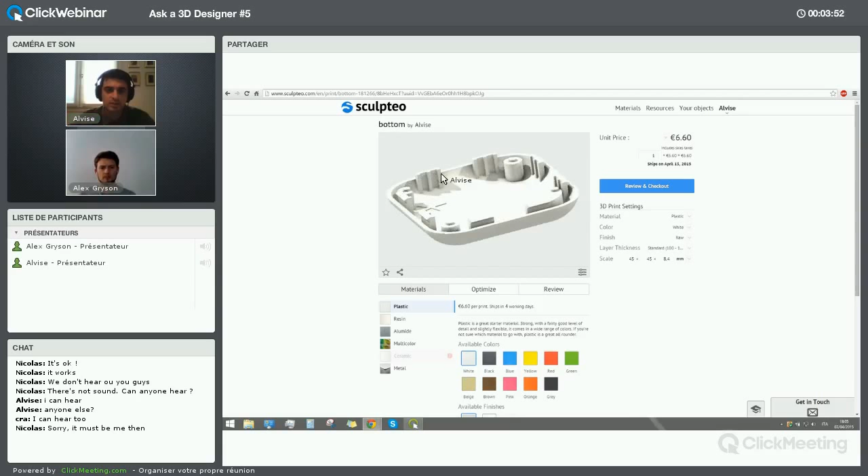Sure, so if I've shared my screen correctly, you should be watching my Sculpteo account. I uploaded the file you were talking about, Samuel Clay's file. It looks to me like the function of this part is a kind of electronic case - yeah, it looks like a kind of casing, a plastic component of a product.

So as you said, the concept for this user was he had to produce a manifold file, and he said he succeeded in doing it, and was asking for more advice. So we took a look at it, and we did see a manifold model, but we found another problem in it, a very small one - it's a multi-shell file. But let's talk about what it first means to be manifold for a 3D model.

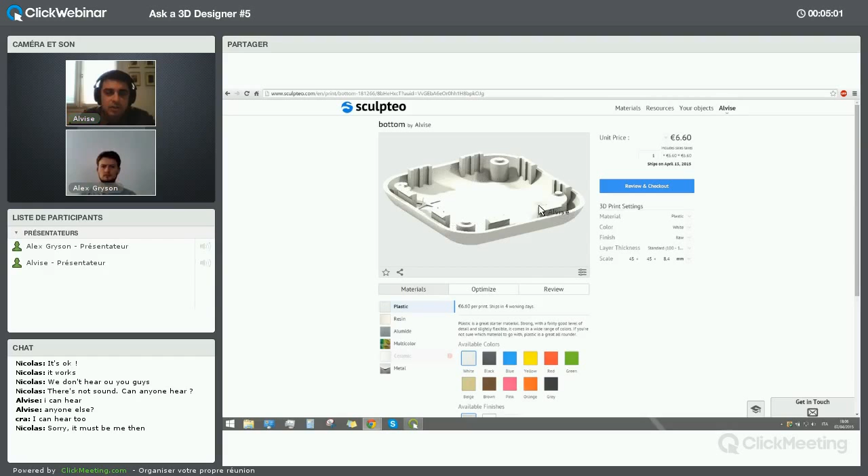The mathematical description of manifold is quite complicated, but long story short: each edge of a printable mesh needs to be connected to 2 triangles, no more, no less. This means that the amount of triangles composing the mesh is closed, or as some say, watertight - there are no holes, it's connected.

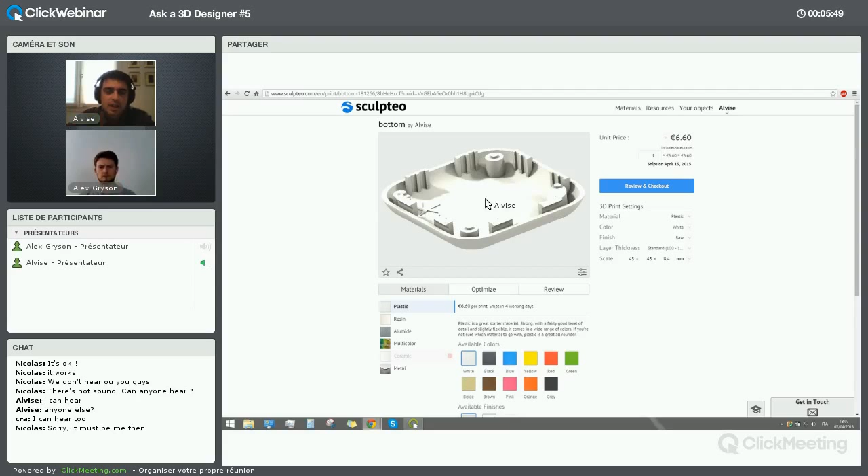That's pretty simple. So this user succeeded in creating this, but what he didn't succeed in is creating a single shell model. So how can this be both manifold and multi-shell? This model is composed of, I think, around 20 shells. Each shell represents a part that is manifold itself, but it's intersecting other manifold parts. So even if the model is the sum of many manifold parts, it's not correct - these intersections are not good for 3D printing.

We've been talking about multi-shell objects already in the past 2 webinars, and now we have another case here, and we can show you similarly to the previous 2 ones.

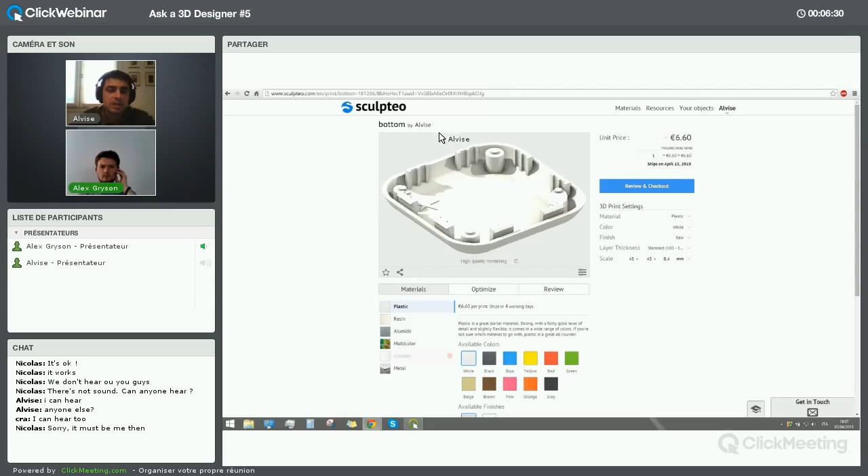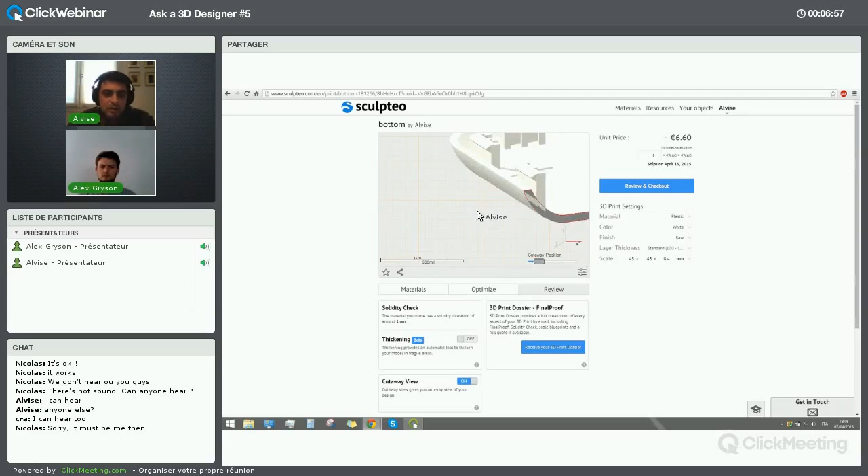So first, take a look at the website cutaway view, identify these shells, and see how this multi-shell file looks. For example, here you can clearly see this snap that is intersecting the base of the part, and in the same way, if I cut away in another way, I can see the same thing with the cylinders on the corners of the part.

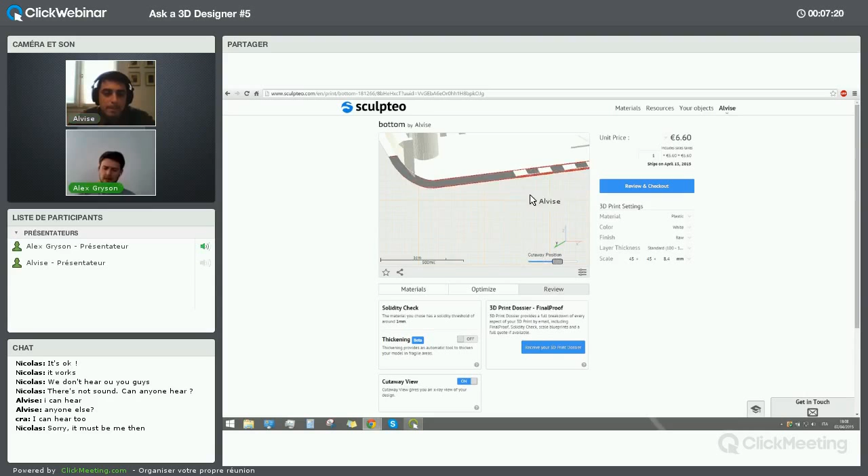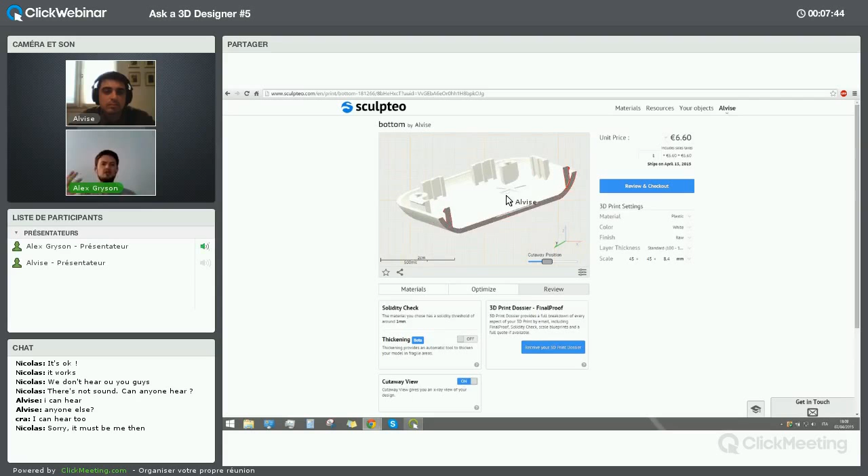Just to summarize here, Samuel gave us a model, and he wanted to make sure the model was manifold, which means watertight, meaning it's a single object and a complete volume that we can 3D print. But it was still refused for 3D printing, and what we can see here with the online cutaway tool is that even though it's manifold, we have many intersecting volumes, causing a shape impossible to 3D print. That's why it was refused, and that's what we need to fix now.

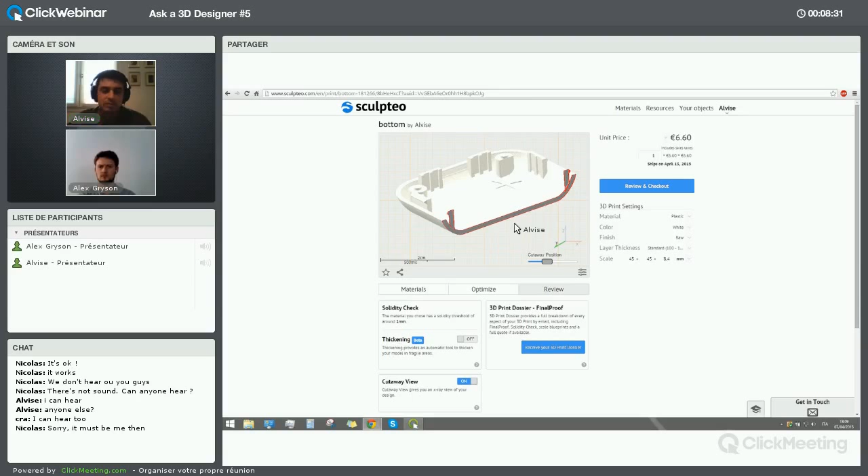The way we will fix this is similar to the previous two webinars. Samuel has been modeling this part in Rhinoceros, and he kindly gave us a modeling file, specifically a step file. So we'll use this modeling file to fix the multi-shell problem.

Every time you have access to the original source file of a model, you have way more control of the part and other privileges that you don't have in mesh modification software like MeshLab or Meshmixer, as we showed in the last webinars.

This is Inventor, the CAD software I'll use for this operation. Step is a good format for exchanging CAD files—it works in every CAD software like SolidWorks, Rhino, Pro Engineer, or whatever. So the steps I'm going to show you now to correctly model this part can be replicated in any CAD software you have. The features are really similar, and the names of the functions might differ slightly, but essentially you will see exactly the same kind of workflow.

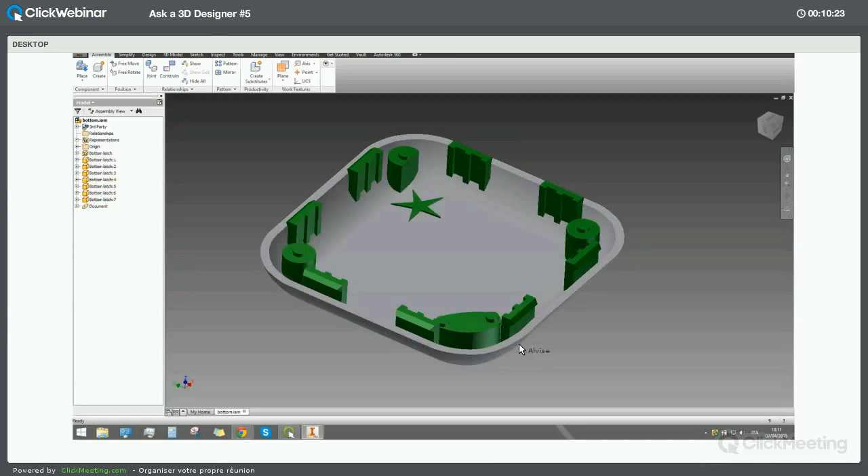This is how the step file looks. On the stack on your left, you can see 9 parts—we are treating them as bodies.

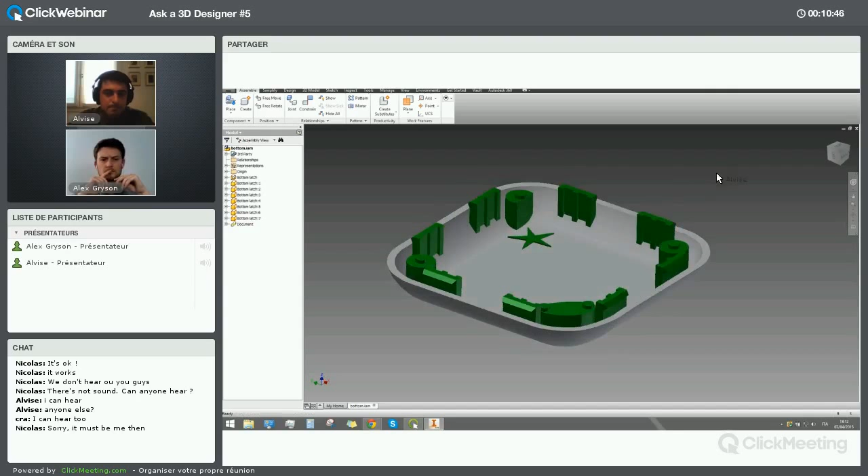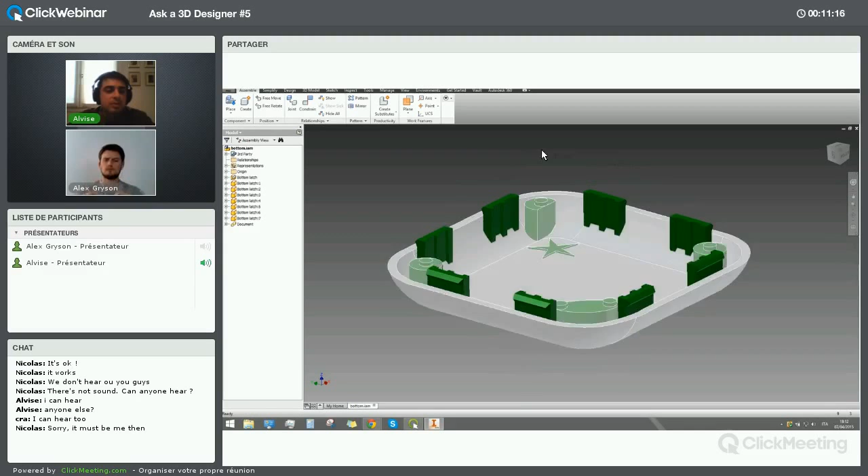The editor showcases a step file. In Inventor, it becomes an assembly file—that's how Inventor refers to it. So every shell of the model is treated as a different part, and there are these 9 parts on the left. The first thing I want to do is check how these parts fit together.

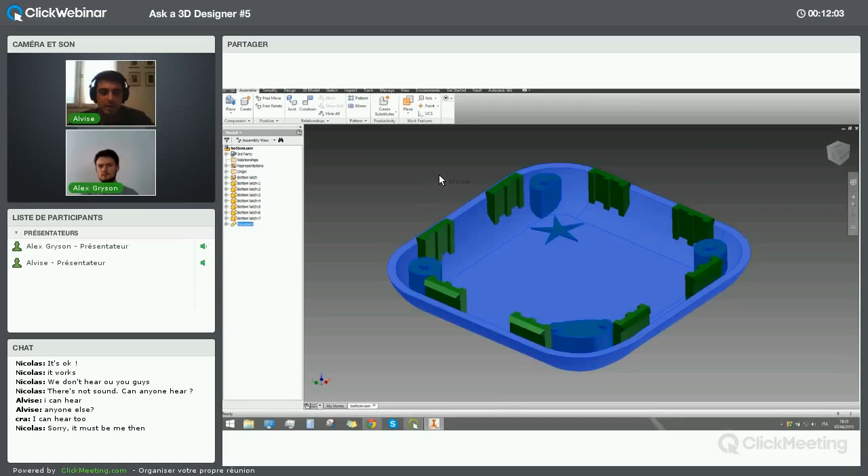To do this, I need a cutaway to see inside the model. The way to modify a part in Inventor when I'm in this assembly environment is, the only way is to enter the part—I can't modify parts while in this environment. I'll enter the first part, the main body of the object, by double-clicking on its name on the left, and as you can see, the stack is open, and I'm now able to modify only this part.

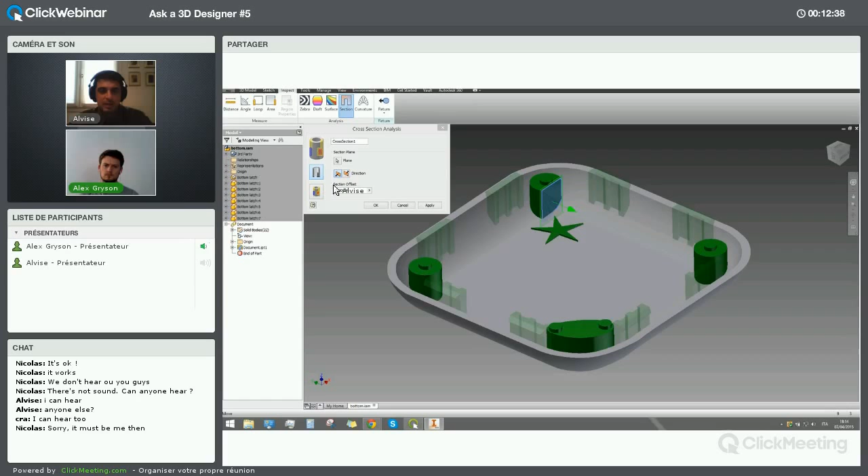For a cutaway view, I need the inspect and section feature—plane that I want to use as a cutting tool—and move it to where, in this case, here, and click apply. I'm now watching inside. In this first part, I have these cylinders that are not exactly intersecting the main body of the object.

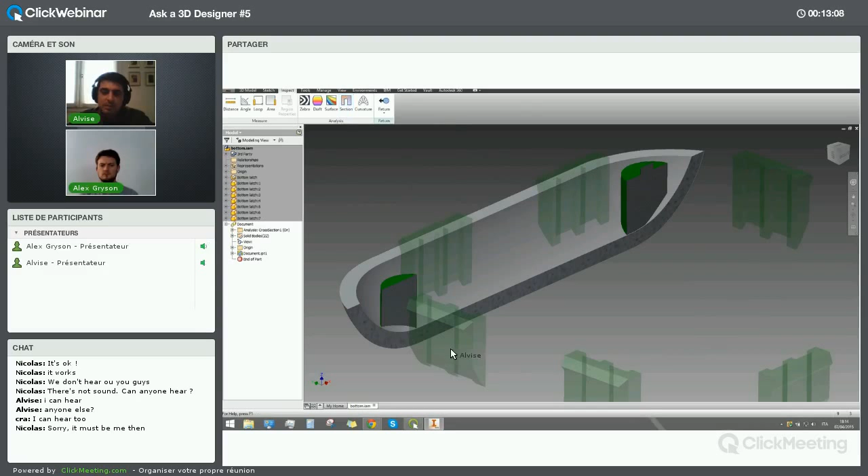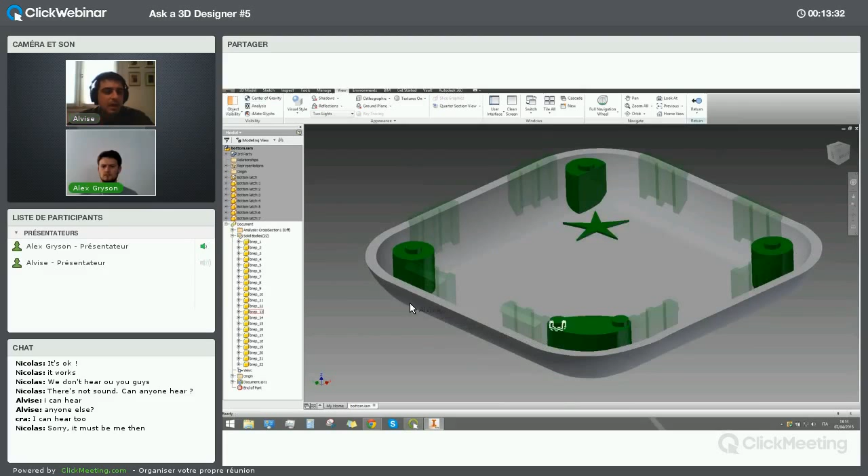In order to fix this as before, I'm going to proceed in this way: open the bodies stack, all the bodies that belong to this object, and hide the main one so that I can proceed to cut these cylinders.

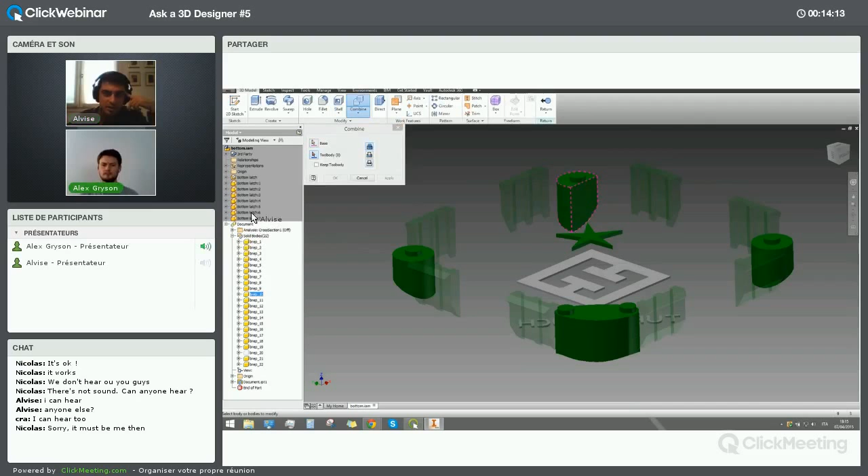As you can see now, I can select them separately. This means that if I want to perform the same operation on each of these cylinders, I'd have to repeat it—to avoid this, I'm going to merge them into a single body so I only have to do this operation once. To merge bodies, I use the combine tool: select first a base, then a tool body. The tool bodies are all the other bodies I want to merge with the first one. The purple is the base, the blues are the tool bodies. Join and apply.

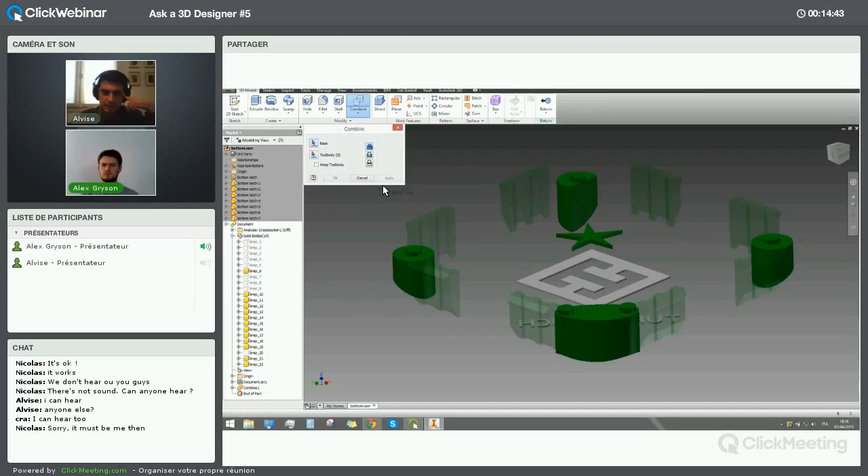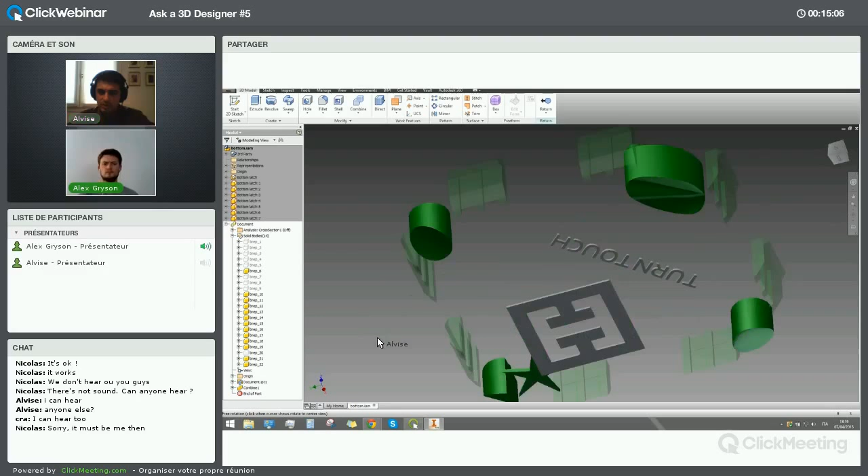Now I can select all of them together. Next, since they are irregular, this won't be a clean operation at all. I want to create a flat base first and then extrude them to reach the main body. So I want to cut these 4 cylinders with a planar cut.

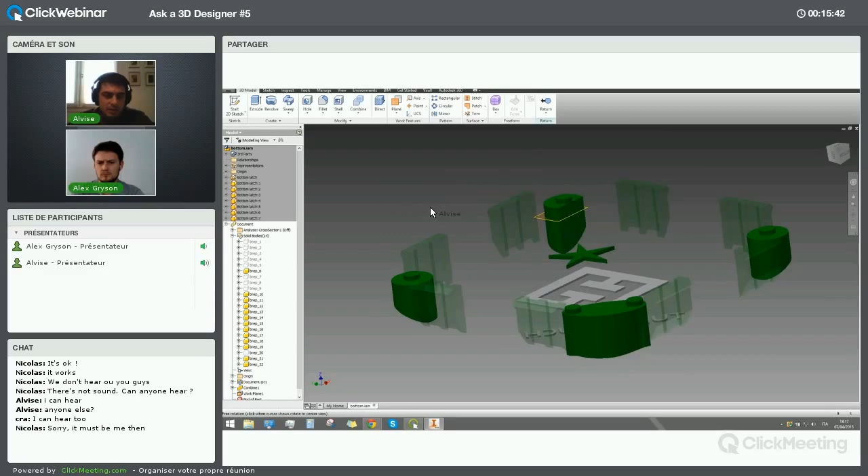I tried to create a plane to use as a tool for cutting. So, offset from plane, the horizontal plane, and bring it. Just be sure it's where I want it to be exactly. And then, split tool.

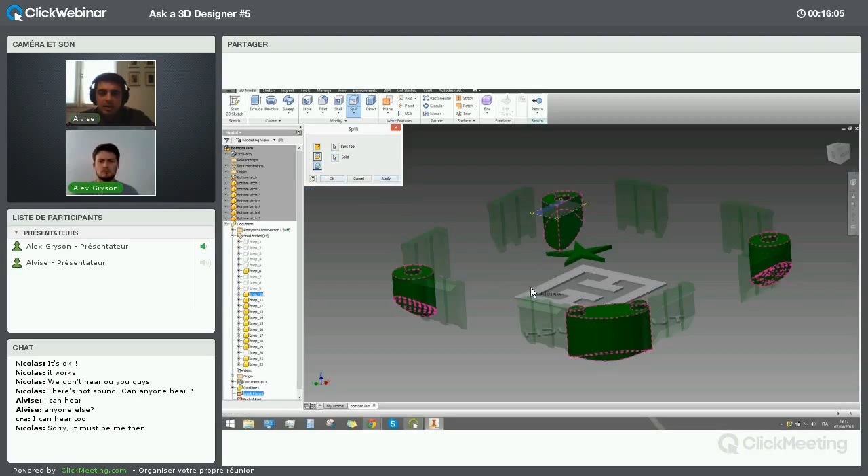I will select the third option, split solid - that's what I want to do. First, select the splitting tool, which is the plane I just created. Secondly, select the solid that I want to split - that is all the 4 cylinders that I just merged. Apply, to see it shaded with edges.

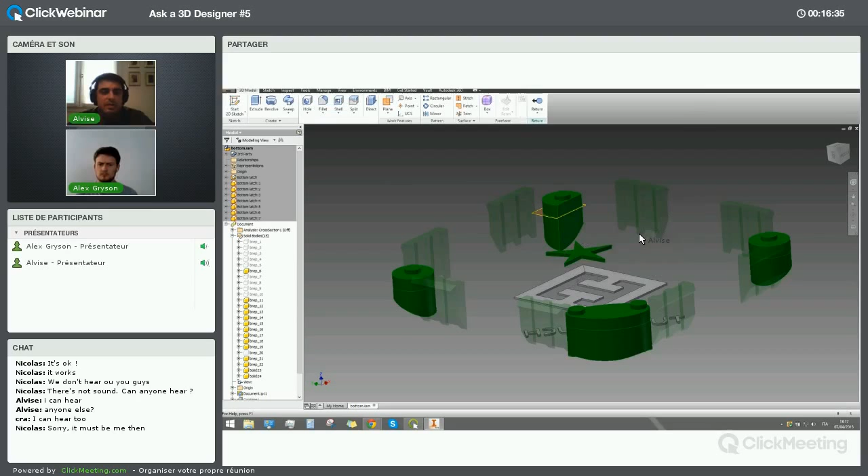So now I can see a line. This means that I cut this 4 cylinder shape, and I want to delete the bottom part. So, modify, delete faces, and select lump or void in order to select all this bottom part, and click OK to delete them. Now the main body appears.

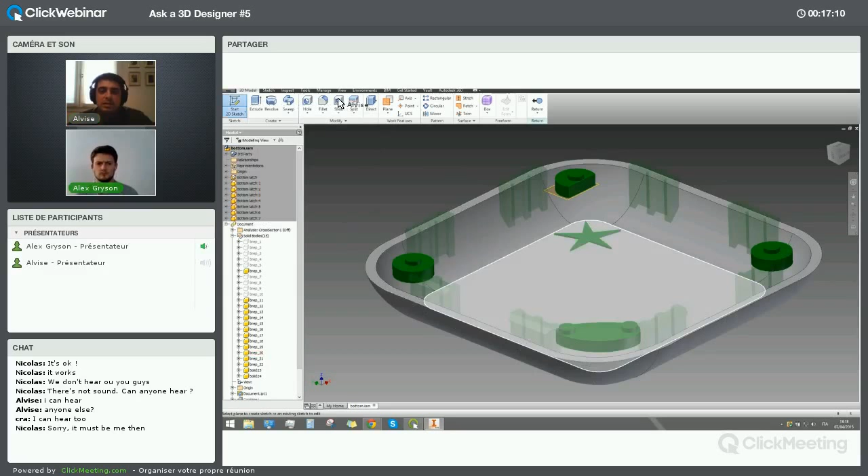Now I have a clean area to extrude and merge with the second one. In order to extrude those faces of those cylinders, I first need to create a sketch to use as a base, so as a sketch plane I use the same plane created before. I'm going to use slice graphics to find those lines that I want to be the base of my extrusion, and project cut edges.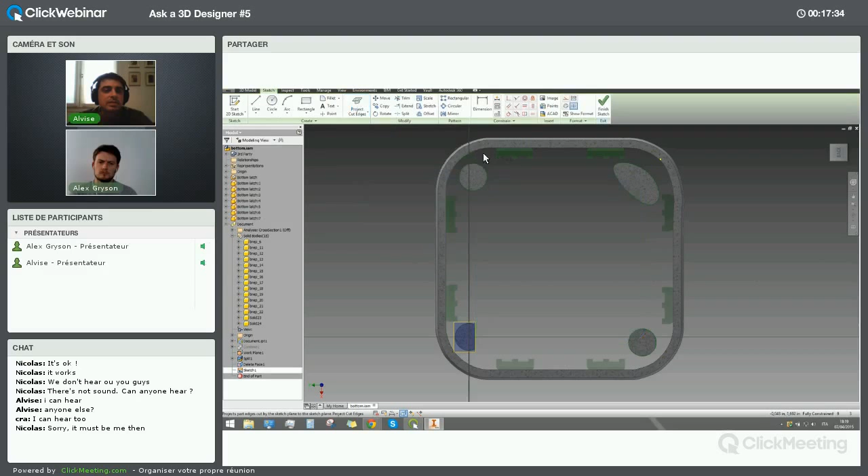Select the plane - those yellow lines are now the cutting edges that I want to use. Finish sketch. I'm going to use the extrude button and select the inside area, the closed loop that I just created. So now I have 4 cylinders, but I don't want them to be extruded.

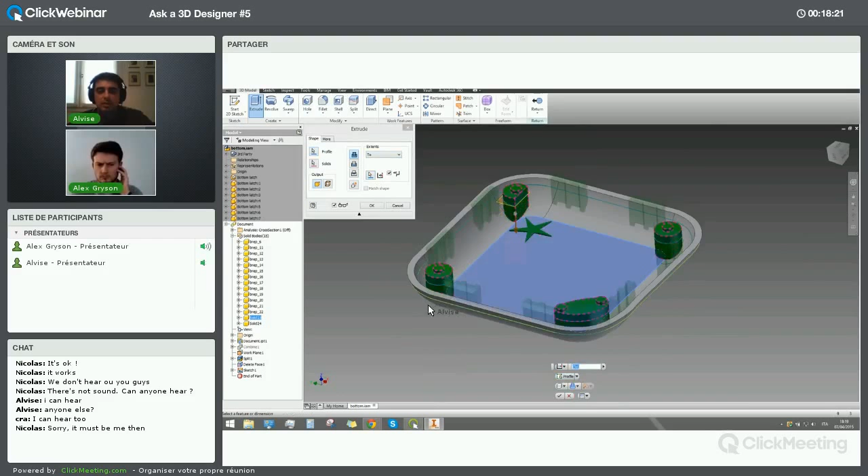I'm going to use the extend option and select... it means that I need now to select another surface to be set as the limit of the extrusion. So I select the bottom surface of this concave part, and as you can see...

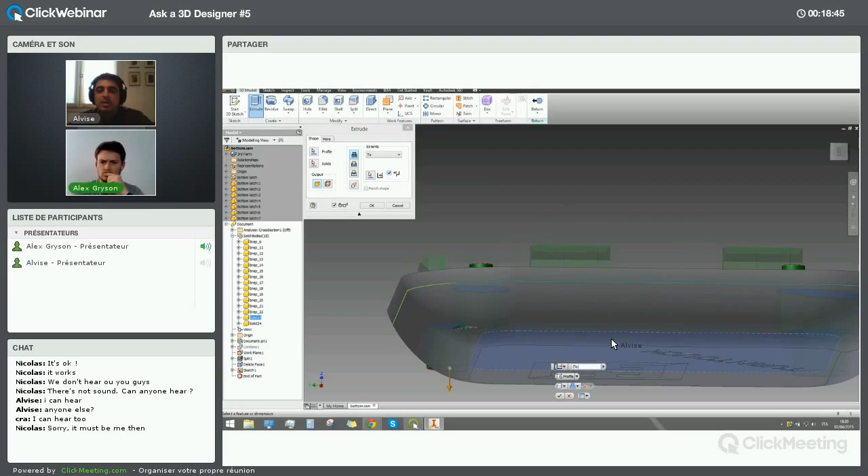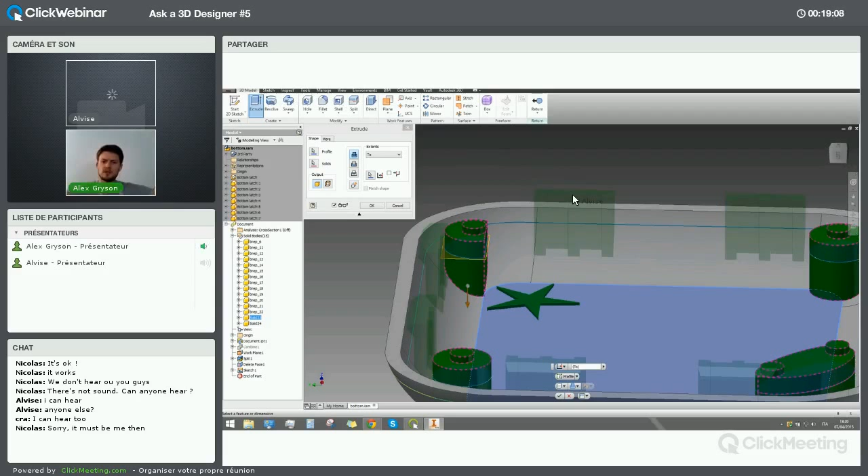Sorry, Alvise, you cut out for me, but I'll just sum up here quickly. So what we had were these multi-shell objects, and what you're doing is using the lower surface to cut these so that we can merge them both.

So I've now recreated this part correctly, and this is the perfect moment for...

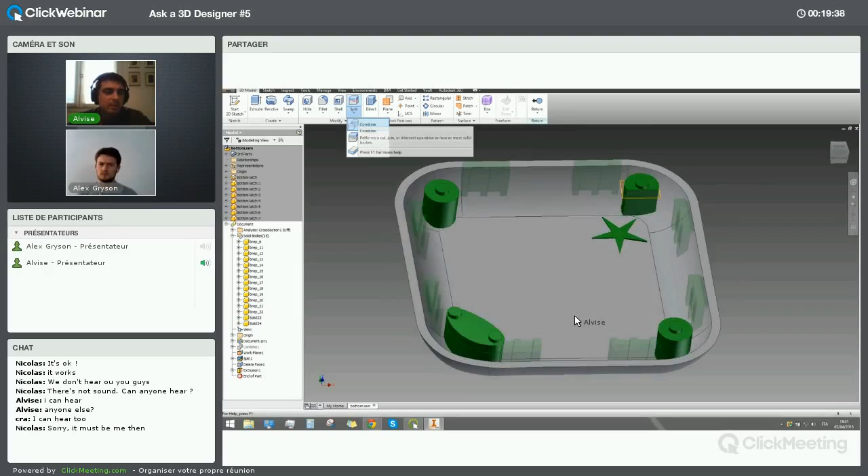...a Boolean operation. In Inventor it's called combine. I simply, as I did before, used the main body as the base and the second as a tool body, and I have this star here that is also an intersecting body, so I used it as a tool body as well.

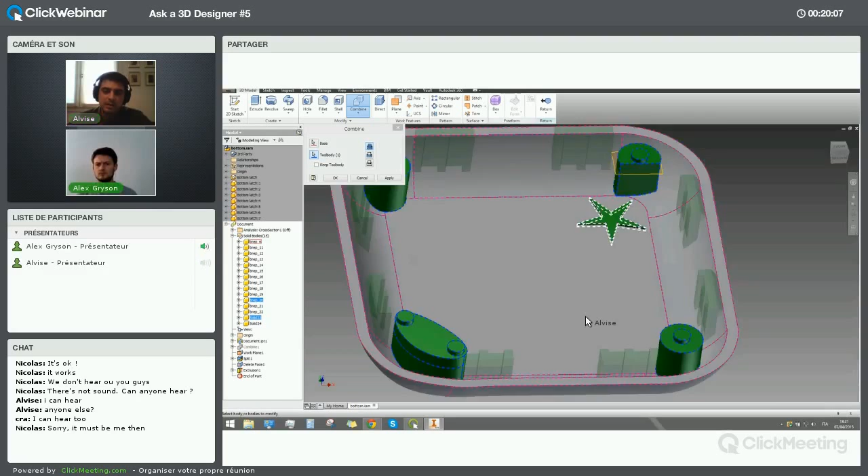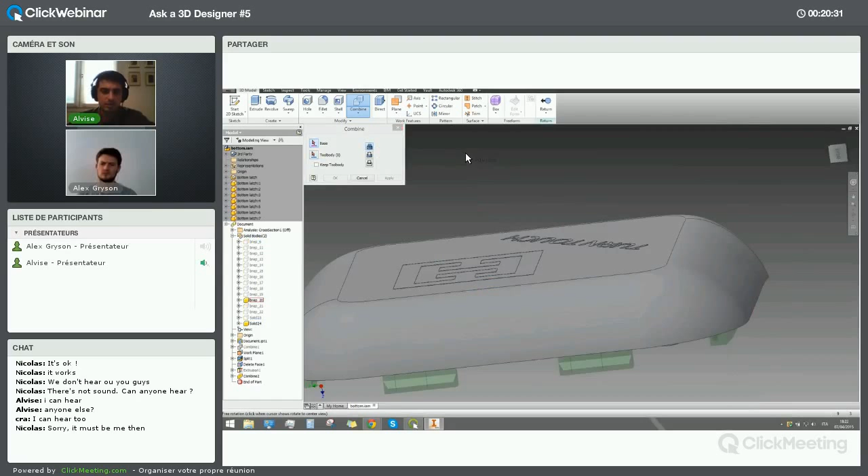Then on the back here, I know that I have more bodies because of the logo. This logo has been drawn on the back and is extruded from the back. So I'm going to merge all of this stuff together, and now I have one whole body - the star is merged with all the cylinders.

I know Inventor, but I don't know how to do that in SolidWorks or Pro Engineer or other solid modelers. Inventor allows you to pick as many elements as you want - you pick a base and then an infinite number of tool bodies to merge. So yes, that's pretty handy.

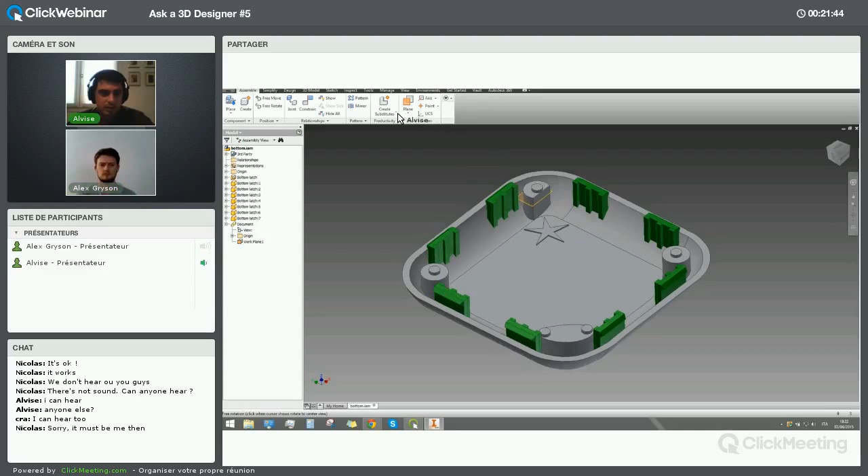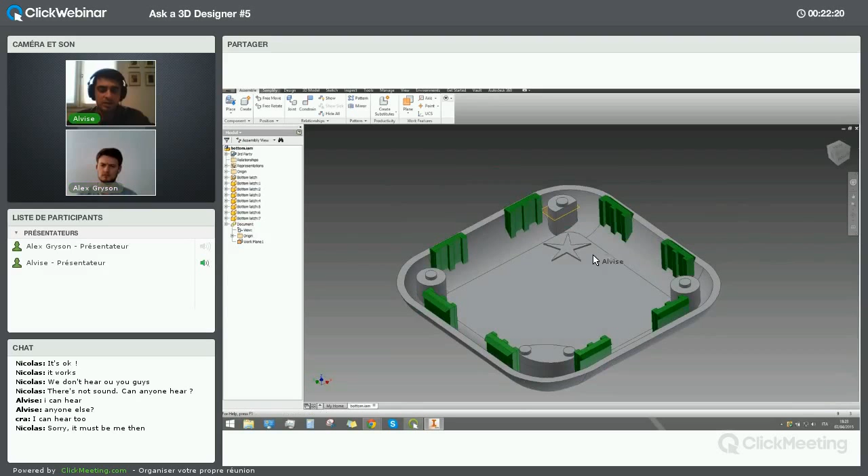So I'm back in assembly mode. As you've seen, I now have a correct main body, cylinders, the star, and the logo in the back. Last thing I need to do is merge these green elements that are repeating on the edge of the main part. Since they already fit perfectly with each other, they just need to be merged to the main body. I will use a feature that Inventor allows.

You can find this in the Simplify tab, and it's a feature you can only find when in assembly mode - meant exactly for this purpose, to merge different parts together into a single object. The assembly must be saved before performing this operation, so I save all my parts, click OK, and go back again to the Create Simplified Part function.

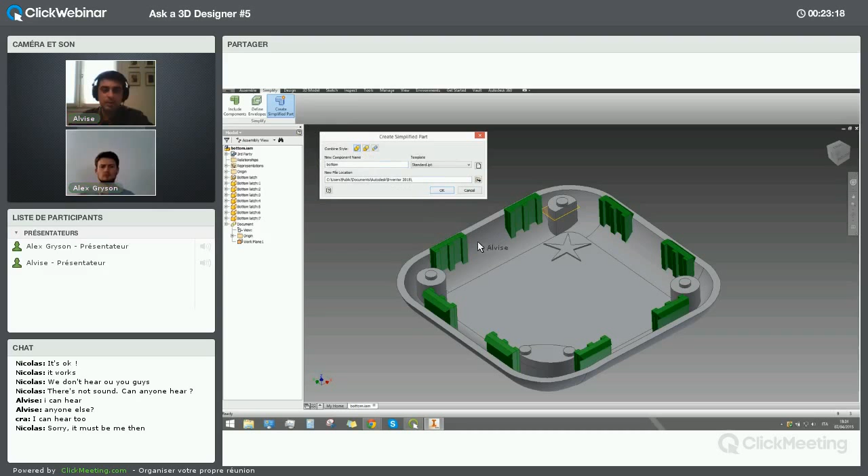As you can see, if you remember, there were colors on the model - some parts were gray, some parts were green.

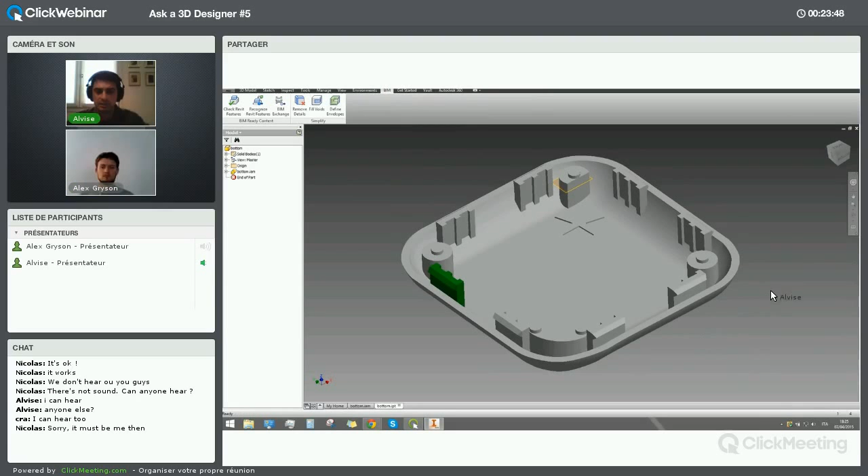When performing this Boolean operation, these colors merge, and the software randomly decides which one to keep. So, for example, this part stayed green, this gray. If you want to keep colors on your model, it's always better to perform all the Boolean or editing operations on the geometry first.

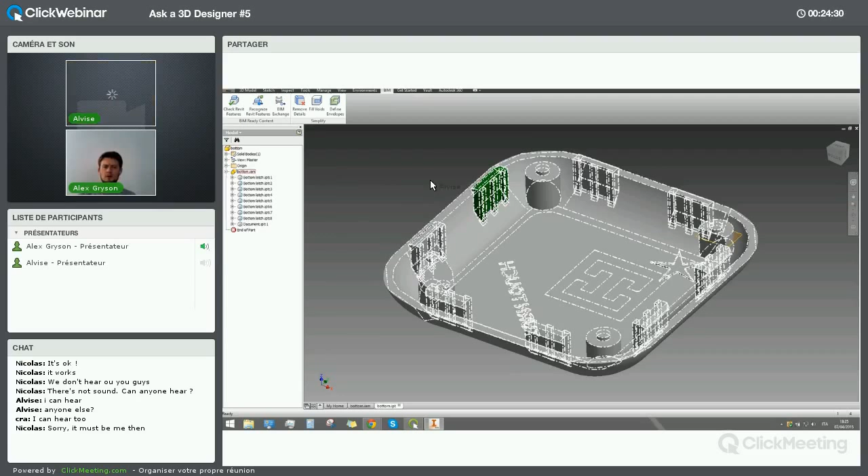And only at the end apply colors to the faces of the surface of your model, in order to be sure they will not be lost or changed. So Alvise, now that we've fused this model together, we can upload it like this to Sculpteo and it should be printable now, right? I've got the result that you wanted. You can see here on the stack on the left.

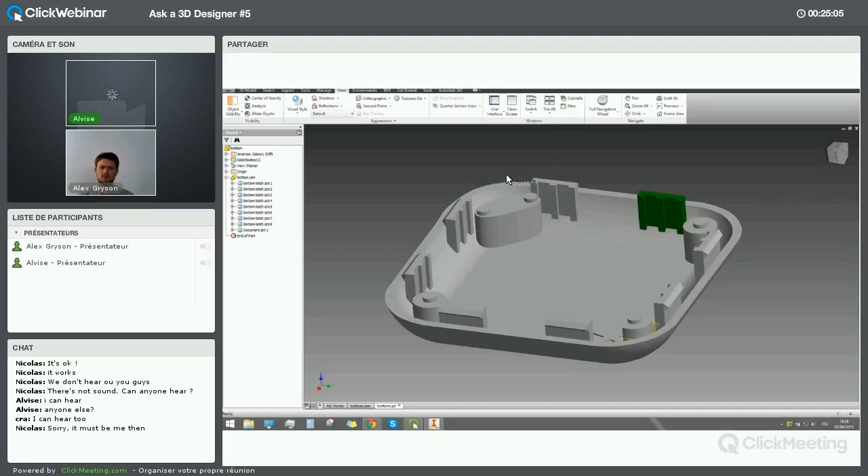Option in print, and then 3D print preview. New environment pop-up. Here you can see that the model has been meshed, and you have some information about the mesh at the top of the viewer: number of facets, 55,000, and the file size here. You can decrease or increase the quality of the model or faces by tapping options. In this window you have a couple of parameters to tweak. For example, if I reduce the maximum edge length, it affects the quality as well as file size, so this depends on the quality you want.

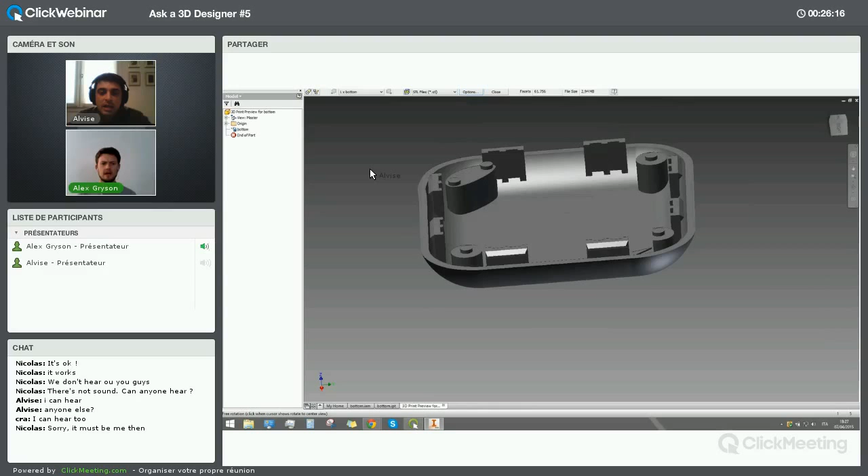Okay, so Alvise, just to cut through, we started off with a CAD file from Samuel Clay. His model was manifold, but it was multi-shell. What we've just done is turn it into a single shell, and that should resolve all the remaining problems for this file. It should now be printable. We might need to stop there for this model because we're at 25 minutes, and I'd like to look at the next subject.

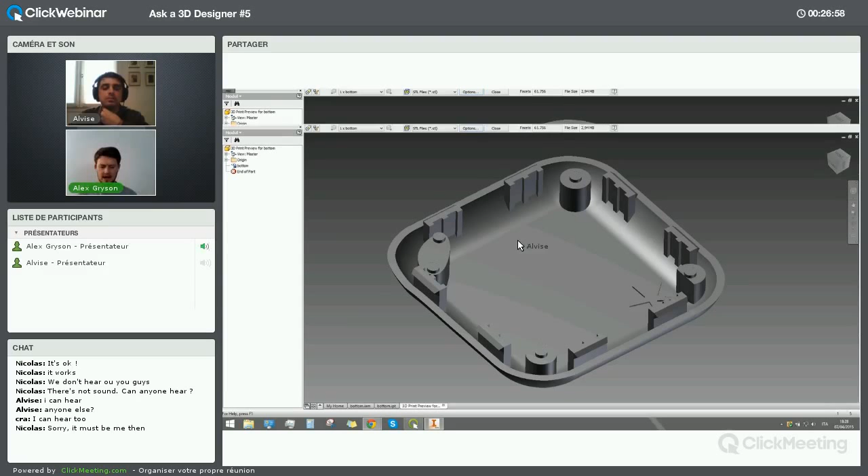We have a 3D scan from Pascal Verbeke, I hope I'm pronouncing your name correctly. And so this is a 3D scan of a head, right? Yes, and it needs fixing. Could you tell us a little bit about this 3D scan?

Yeah, we'll just open it up. So just to explain, Pascal is another customer who sent us this file. Okay, so here we see the scan.

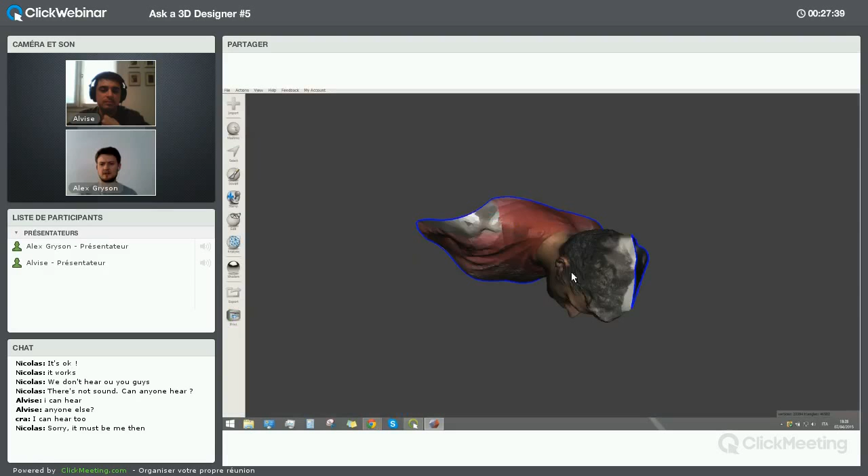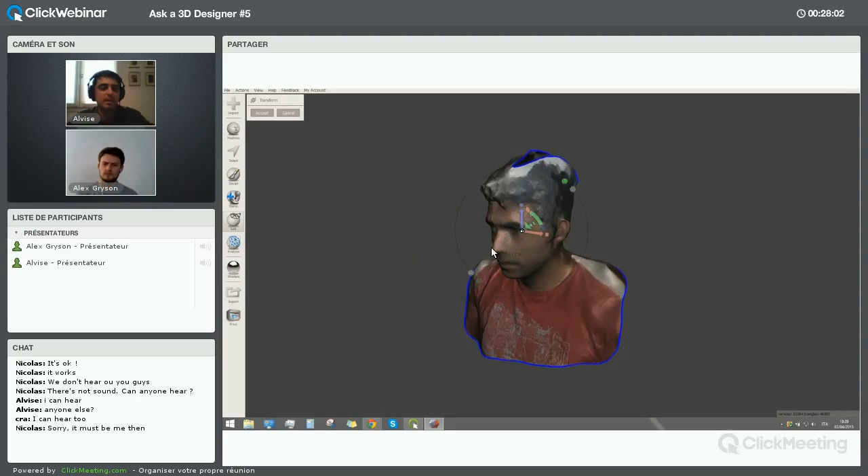Okay, so we can see your screen now, Alvise. We can see there's a hole in the head here. We'll need to be able to fix that and also maybe create a base. Okay. Yeah, can you hear me correctly now? Yep, that's fine. So tell us about this scan.

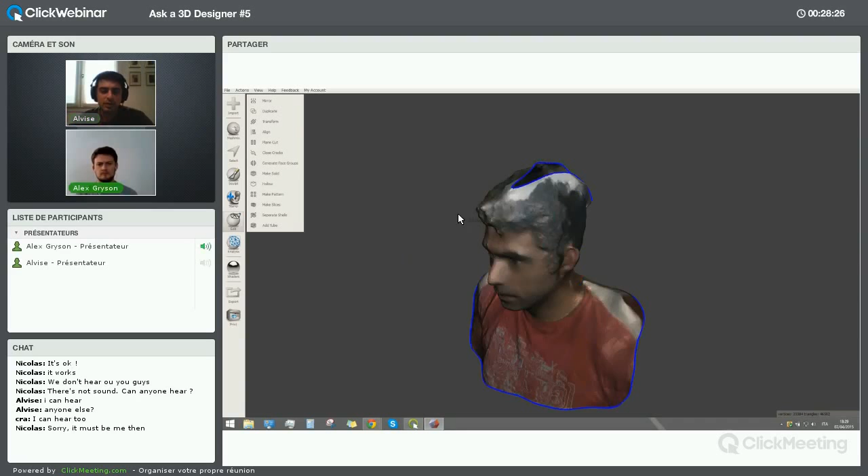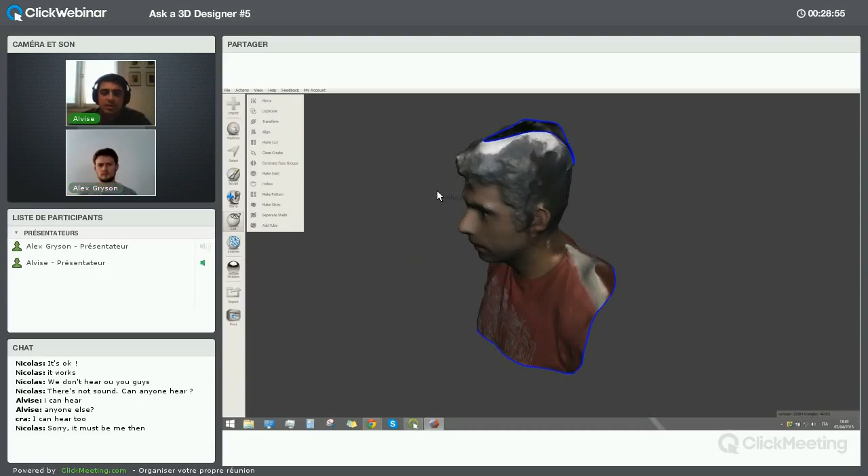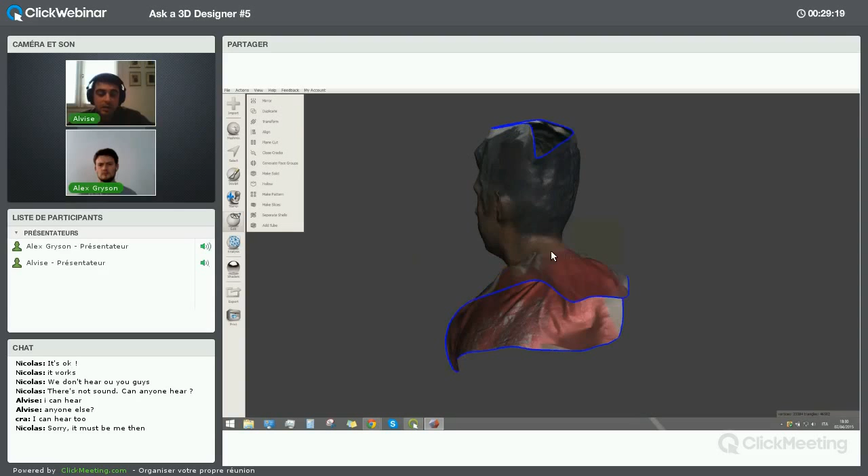We just opened this OBJ file with texture, and we can see that the blue lines are defining two big holes in the mesh. We want to basically close these holes. They're not very simple holes because they're big, and this requires the user to actually create new geometry. They have to be handled a bit differently from normal holes.

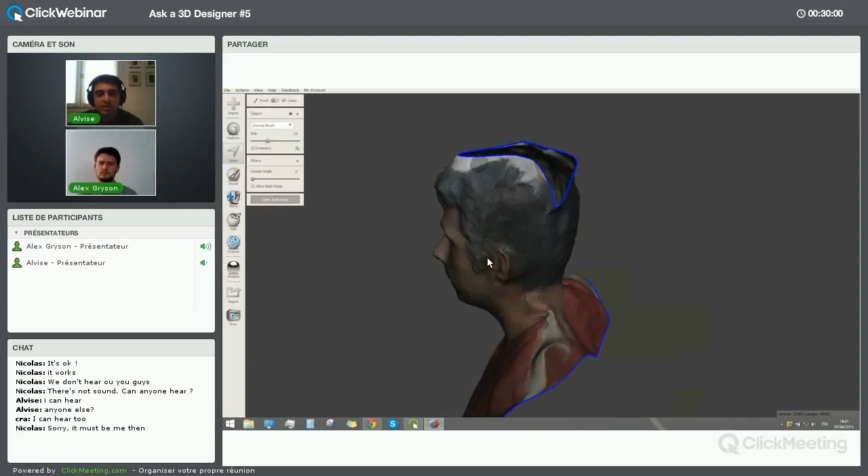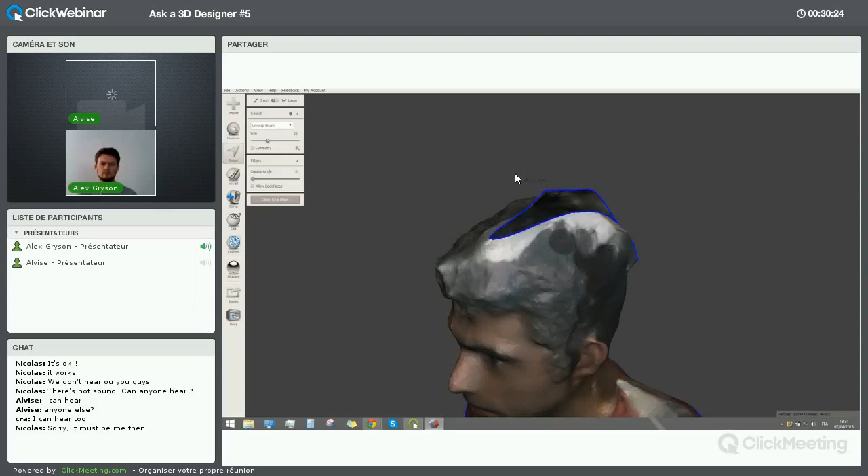Okay, so Alvise is selecting the lip of this hole, and he'll now be able to close it up. So I'm defining all the areas that look strange on the head. I want them to be deleted.

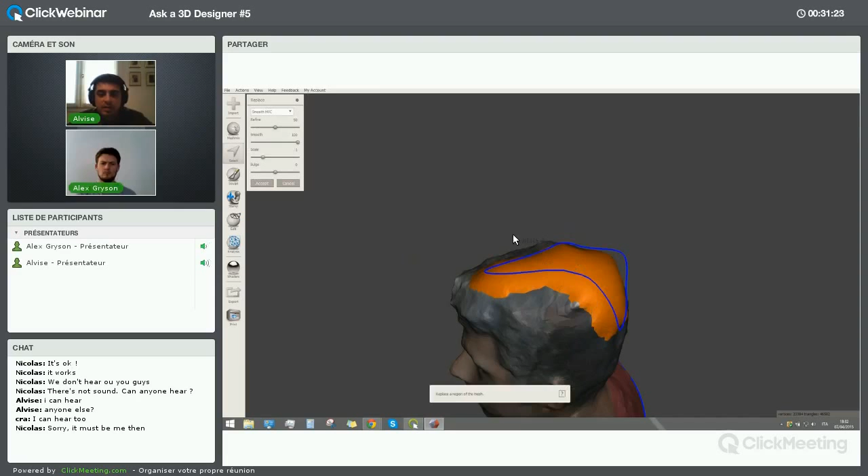All right, and the tool is edit, erase and fill, in the selection tab. So as you can see, all the orange triangles that I selected before have been deleted and substituted with this new geometry that is now covering the whole hole.

In the top left, I have some parameters. I would suggest you first press W on the keyboard so you'll be able to see the edges of the triangles. The first thing I want to do is make all the new triangles as big as the triangles around them, so the model will look uniform. To do this, I will tweak the parameter refine, and adjust it until I visually think it worked.

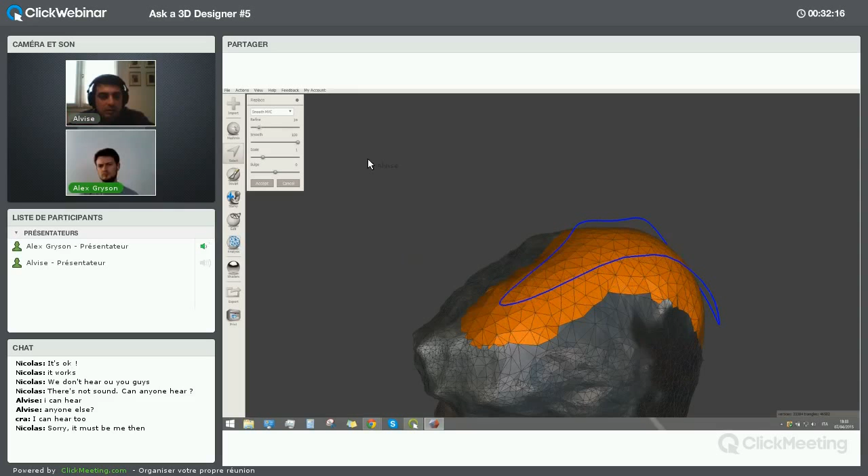Be a bit smaller, too big. So we'll bring down the scale value.

Here I can play around with this smooth tool. It's very useful, smooth. It tries to create tangency in the edges, so I will keep it high in this case. So yeah, the shape looks good now.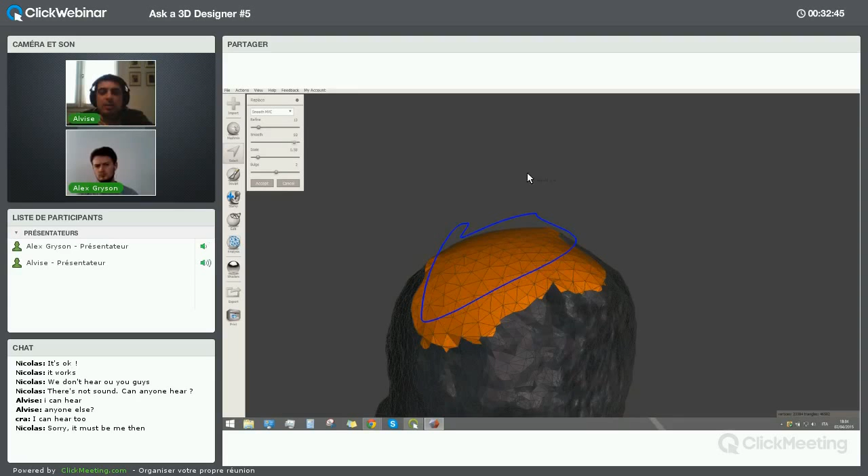I'll click on accept, and the modification has been updated on the model. As you can see, the colors of the textures have been reported on the new geometry. Pay attention that on the new model there will be a new image file representing the texture applied to this new geometry, and this new image file has to be included in the zipped file you will be uploading to the website or opening in another software, whatever brings this model.

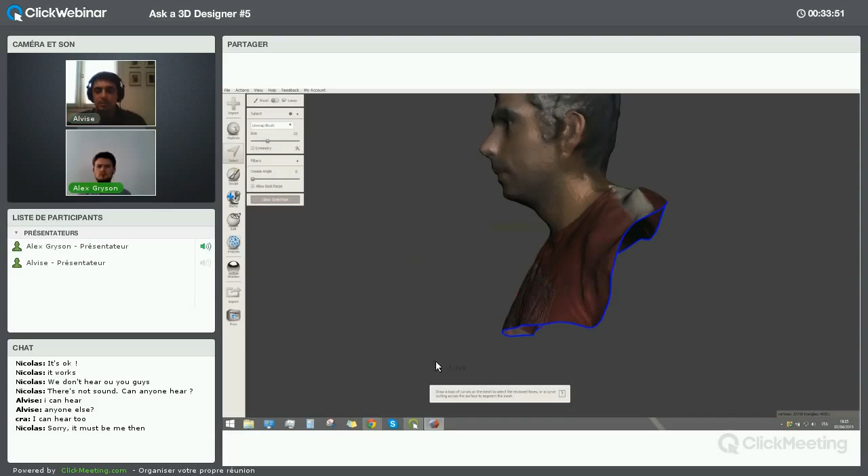So let's now go to the main problem of this mesh. Same technique to close this part, but tweaking it a bit differently. I will try to create new geometry on the back, all this part here, in order to make a planar cut later and have a flat base in the model.

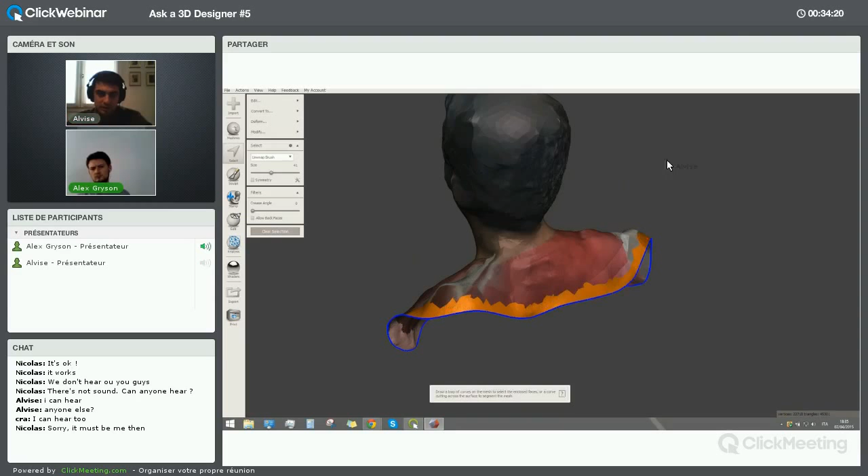Then I would need to cut all the shirt back, what I want. So again, try a bit bigger, and I'm selecting all the areas on the edge. As you can imagine, the scale parameter will be kept higher in this case to create a bolder part.

Okay, now we're good. Edit, erase and fill. Big, lower the scale, the bulge as well.

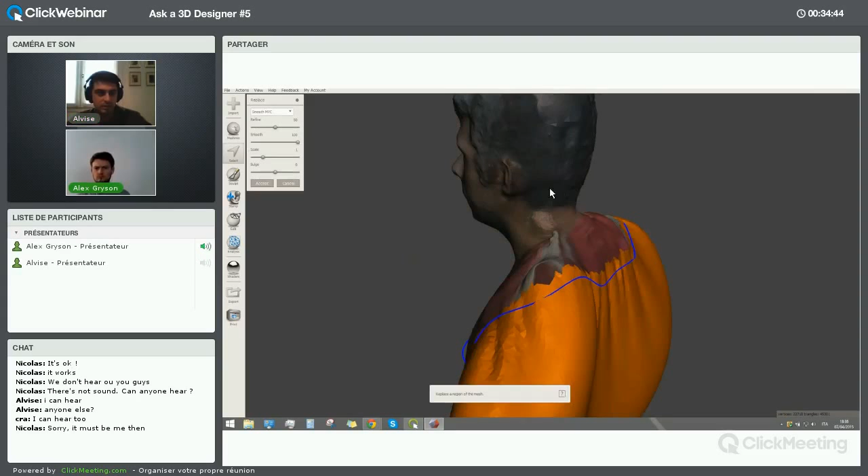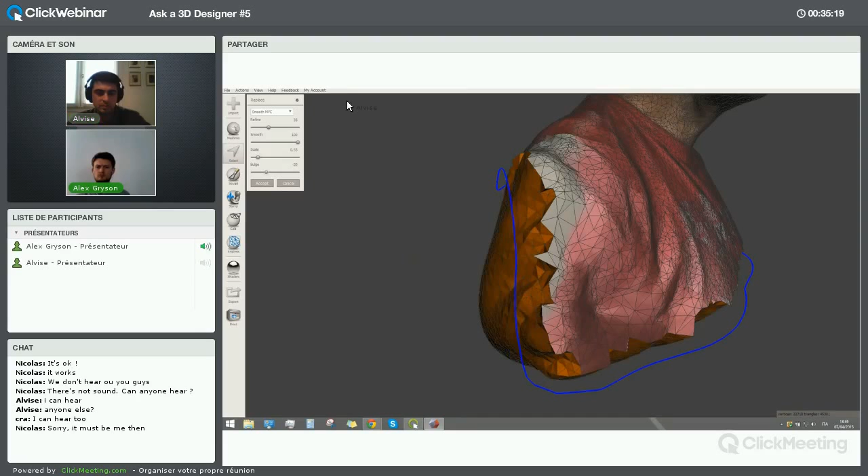Showcase the edges of the model. Okay, I think we are right with this step. Click on Accept. It has been updated and returned on the new geometry.

The base is still not flat. It's the last step we will do to make this model perfect.

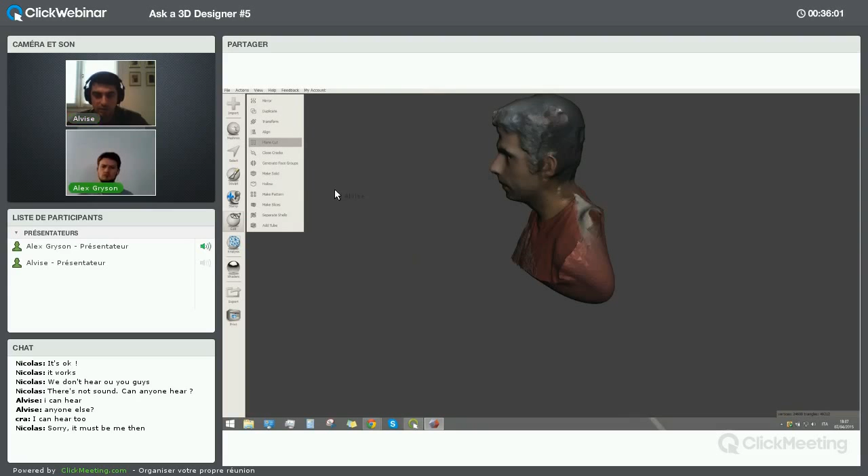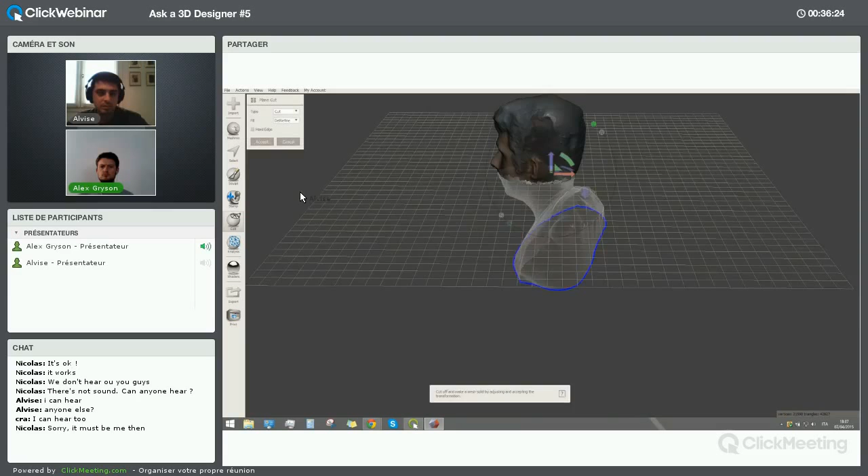Then we do it again. Okay, this area has been correctly filled.

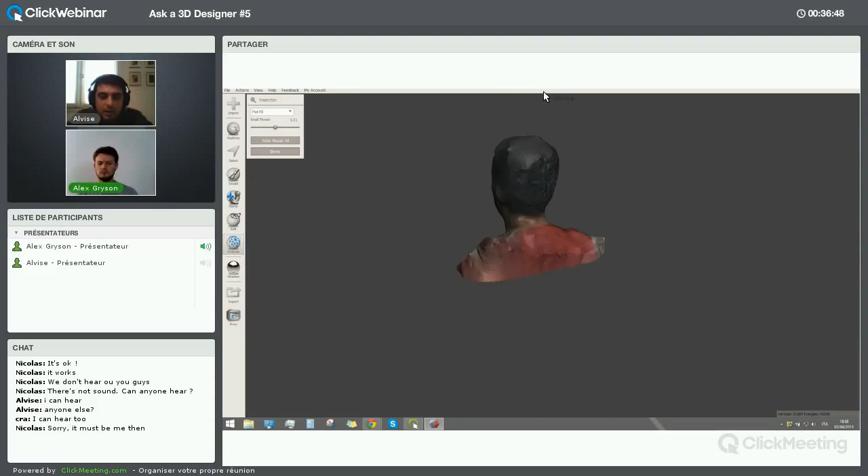And if I now go to Analysis and Inspector to check the printability of the model, I see no problem highlighted on the model. Okay, so it now looks printable.

I'm now able to export this model in OBJ format, to keep... yes, able to export the model in an OBJ format, keep the new textures. We'll call it mesh fixed.

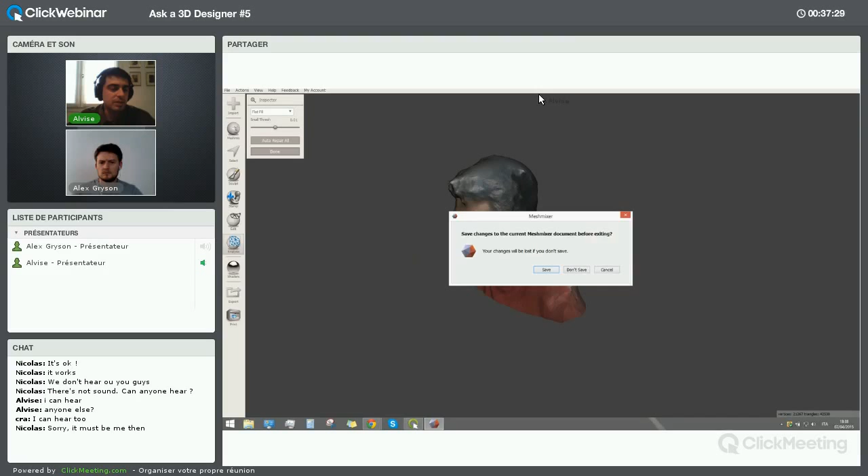And it's good to see what this model, this file, looks like. Mesh fixed - you can see there is a new folder that represents the hole we've been filling, and we have to... hang on, that I didn't see... include this new texture in the new file.

So let's go to this view - mesh fixed, OBJ, texture files. Zip them together in a single folder, and that's what we want to put on the website.

Okay, the file is 1.5 MB. It's gonna take around 1 minute.

If you agree, we can skip this part. I already uploaded before the webinar started, so we can take a clear look at the result of this second fixing.

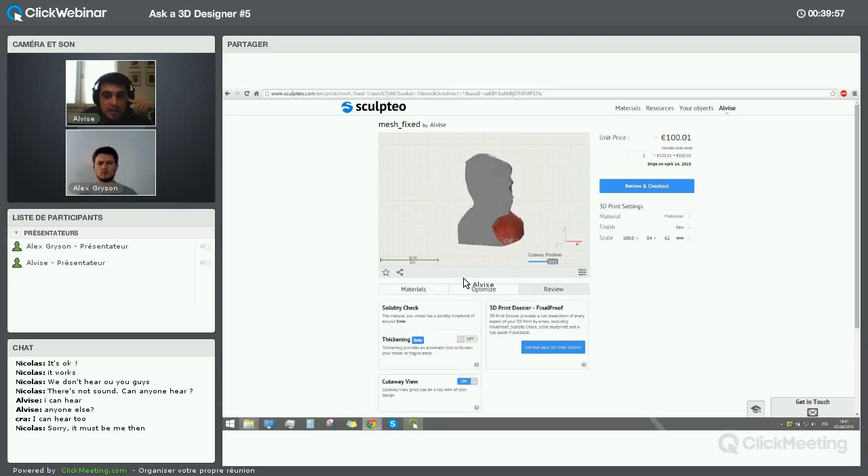It became a bit more expensive, way more expensive. And here it is. Let's take a look at it inside, and the cutaway view looks totally cool.

What I can try to do now, since I increased the scale in this model, is try to reduce this new price by deleting unwanted material inside the model. So we have a specific tool for this - you can find it in the optimize tab.

It's called the hollowing tool, and it hollows the model. Okay, so the model has been hollowed, and now we're just going to add 2 holes that have been automatically sized so that we can remove material that hasn't been used, and created the hollow part.

Yes, the website is asking me to create... Okay, I've lost you, Alvise. But yeah, so we've hollowed the model now. We've accepted the hollowing and saved 35% on the price of the model. And if we scale it now, if we reduce that to say 80 millimeters, we're automatically going to recalculate all of that hollowing and the size of those holes, so that price will automatically update.

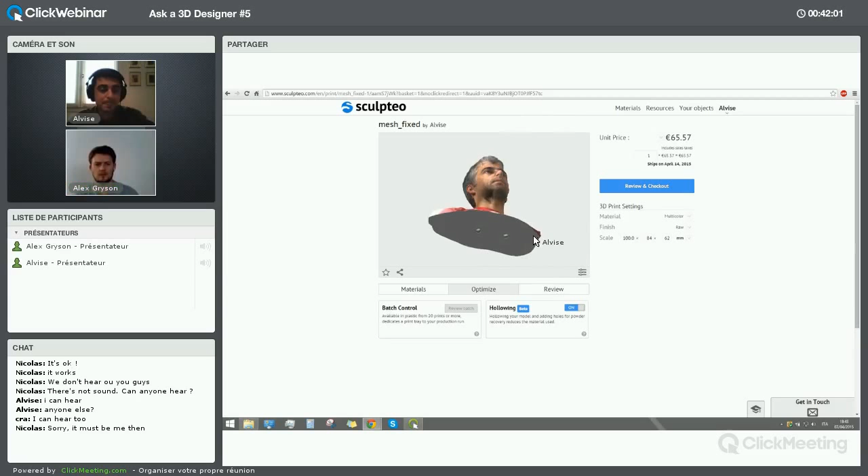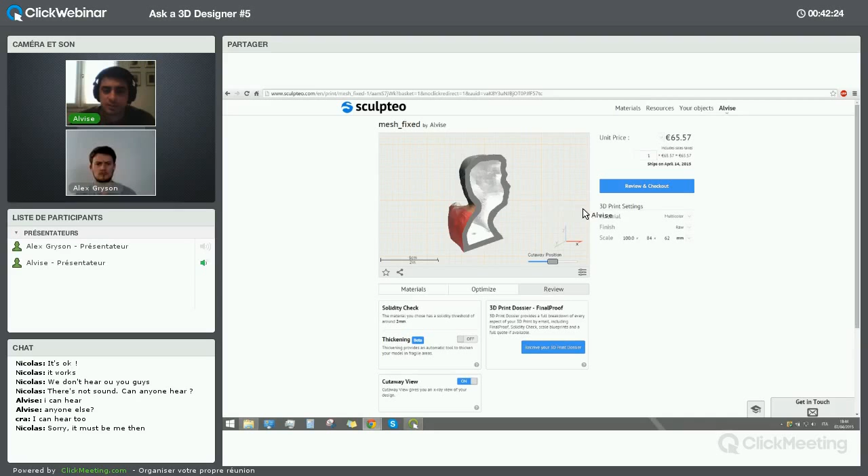So the hollowing tool finished well. It was pretty quick, as you can see, and with simple execution we saved 35 euros. I'm showing you now how the model looks inside. So we are now, if we want to, we can add it to the cart and take a look at the solidity check. It's now appearing on the screen. This looks good, and then add it to the basket and order. Great, and receive it at home.

So I might just sum up now. We've just seen Pascal Verbeek's scan. Pascal had done the scan and needed it fixed because it was basically just a wrapper, a shell that had no volume. What we did was import it into Meshmixer. We were able to clean up the file by filling up those holes, smooth that out, and make a base by making a planar cut. Then by hollowing it on Sculpteo, we were able to save a lot of money on actually making that printable. We were able to hollow out any unused material inside.

We were able to save on that 3D print, and that took, I think, 10 or 15 minutes maybe, to fix up that model. Naturally, with a bit more time in Meshmixer, we could clean up the colors on the back and have a nice model with a good solid base. But for 10 or 15 minutes work, I think we were able to do a lot in a very short time.